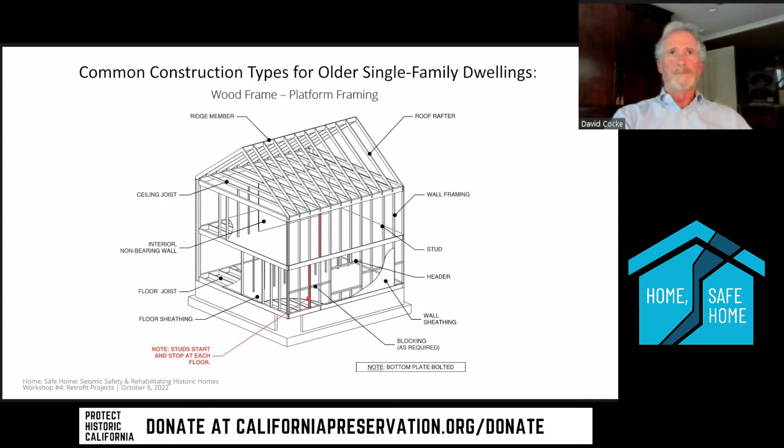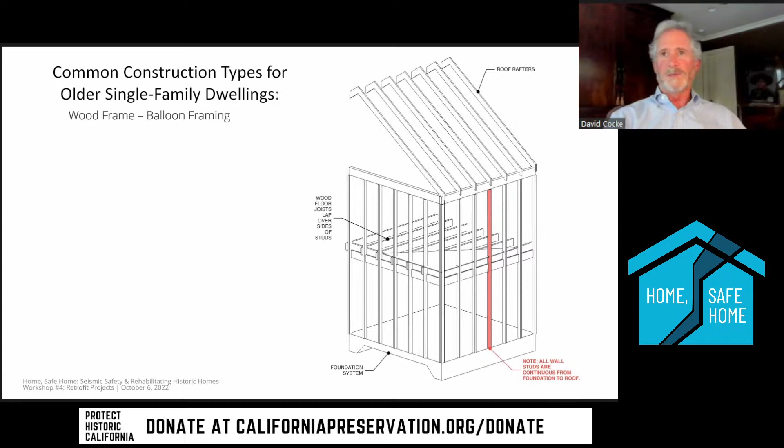A second type, an older style of construction than platform framing, is called balloon framing. That means all the wall studs are continuous from the foundation to the roof - one of them is highlighted there. What happens is the second floor joist ends are attached directly to the wall studs at the right height in one direction, and in the other direction they just put a ledger along the inside face of that wall stud - that's how they attach the second floor framing. Then they go up to the roof and build it on top of those tall studs. That's called balloon framing.

The third type, again wood frame and probably not as common, is called post and beam - a series of vertical posts and horizontal or sloped beams bearing on those posts. This isn't locked into only wood frame, it could also be steel frame. Some structures designed in the 50s, especially in Southern California, might be steel frame. Again, these are not as common as platform or balloon framing, but they are out there.

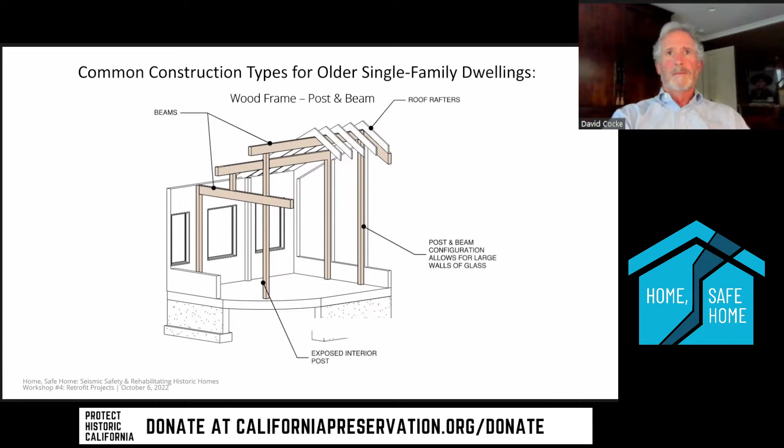Another type, significantly older and now more rare—it's not even allowed by code anymore—is called single wall construction. There's really no skeletal framing in the building. The vertical loads are supported by vertical boards, generally around the perimeter of the structure, but some interior walls can also be single wall framing. These vertical boards, usually 1x12s, 1x10s, or 1x8s, aren't as strong and forgiving as a wall stud system like we looked at in platform framing and balloon framing.

And often there's no foundation when they built these. These were generally rural applications, and they didn't build foundations—they just smoothed out the ground, set the wood directly into the soil, and went up from there.

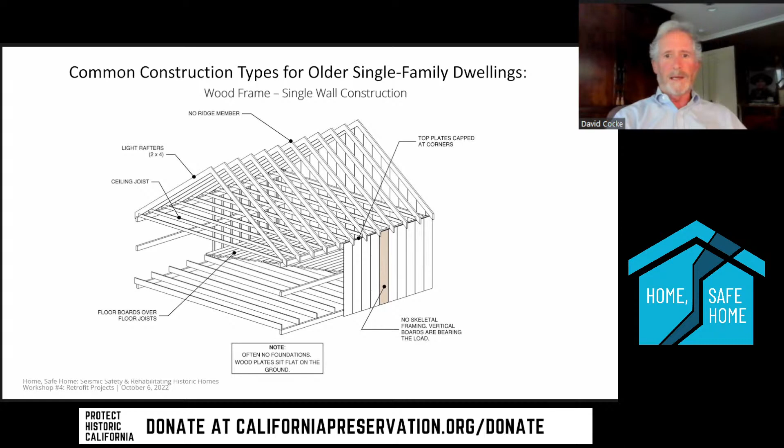There are also bearing wall buildings out there. They can be brick, adobe, what people call cinder block or CMU (concrete masonry units), stone, or hollow clay tile—a variety of these elements. But the difference is there are no wall studs behind those walls. All the vertical load, and even the lateral seismic load, is resisted by these masonry bearing walls. So if the wall were to fail, you would lose the vertical support of the floors and roof above.

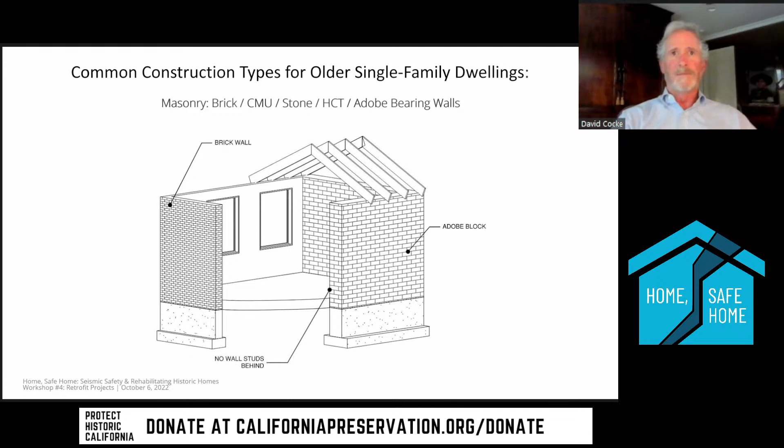Now I want to talk about three different foundations—we covered this last time. There are really three different systems, other than the single wall construction I mentioned. One is a slab on grade: they smooth out the soil and cast a concrete slab anywhere from 3 to 5 inches thick. Older homes may not have any reinforcing steel in the slab, but it rests directly on the soil—there's no raised floor, no crawl space underneath that first floor.

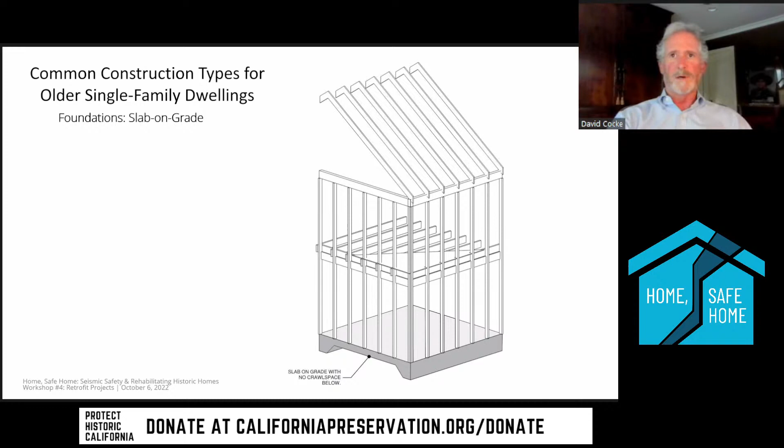The second type of foundation I want to mention is what we call stem walls. That's where you have the footing, the lower piece bearing in the soil, and then a short wall, which may be brick, stone, or concrete masonry units, maybe a couple of feet tall. Again, there's a raised floor, creating a void underneath surrounded by these stem walls, which forms a crawl space.

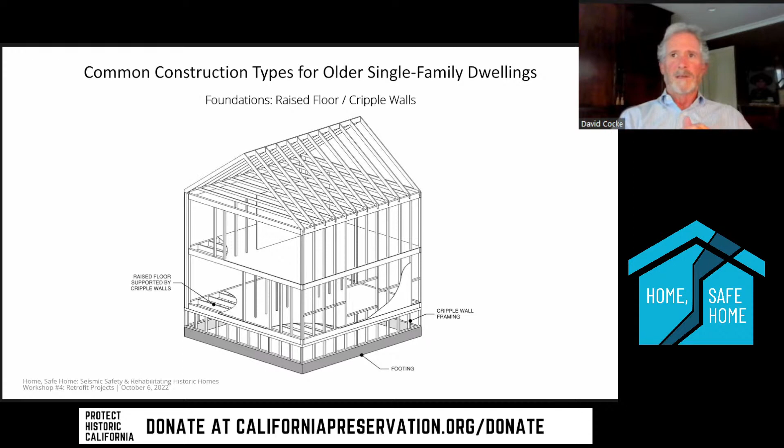Finally, we have what we call a cripple wall condition. Instead of a masonry, concrete, or CMU stem wall, you have short stud walls building up from the footing and supporting the first floor. Again, a raised floor with a crawl space underneath, and cripple wall framing underneath—these could be anywhere from 1 foot to 4 feet tall.

So those are the building types I wanted to jog your memory about and how we will deal with them. Now I want to talk briefly about the California Historical Building Code.

First, there's no trigger in the Historical Building Code—nothing says that if your structure has deficiencies, you actually have to go retrofit it. There are no government regulations requiring retrofitting. It's only mandatory when triggered by other code issues, and even then, it's still the applicable code. So if the building department says you have to fix your building, and it's a designated or eligible historic building, that would require bringing it up to the provisions in the Historical Building Code.

The last thing I want to mention about the Historical Building Code is that it's voluntary—nobody's going to make you do it. In fact, it specifically allows for partial upgrades. So if you have a list of five deficiencies you need to fix in your building, you're allowed to go back and address them one at a time.

And you could do one of these elements, go on, retrofit it, fix it, and then wait a few years later and do the next one if you wanted to. You could stretch these out and do them in phases, which we will talk about.

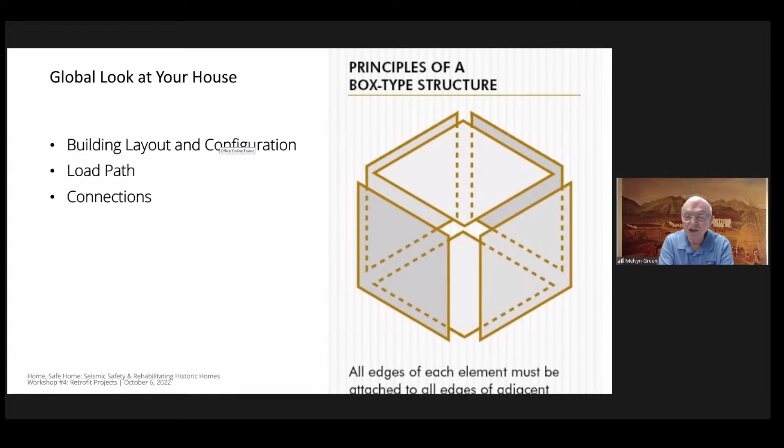Want to talk about looking at your house or various buildings and see what we see. First I want to mention that buildings, for the most part that we're dealing with, are what we call box type structures. If you think about a box, how relatively rigid it is, whether it be a simple shoebox or a grocery box, you can envision the walls and the sides of the box as being shear walls, the top of the box as being our floor or roof, but we call it a diaphragm here. What we're trying to do is make our box adequate in strength and its configuration.

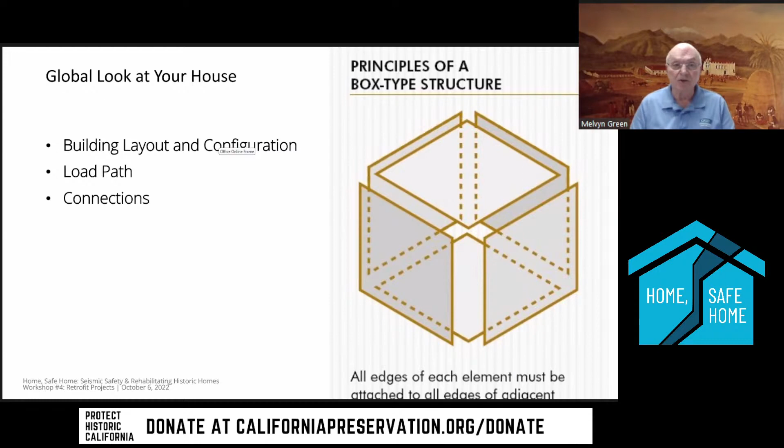We're also going to look at load path. How do the loads get through our building to get to the ground from the roof? And then connections of how we connect everything together. I used to say that the three most important things in real estate were location, location, location. I think in structural engineering, it might be connections, connections, connections, because that's often where buildings fail.

It was probably built in the 30s, perhaps the 40s. So it doesn't have quite the tying together elements that we as engineers would prefer.

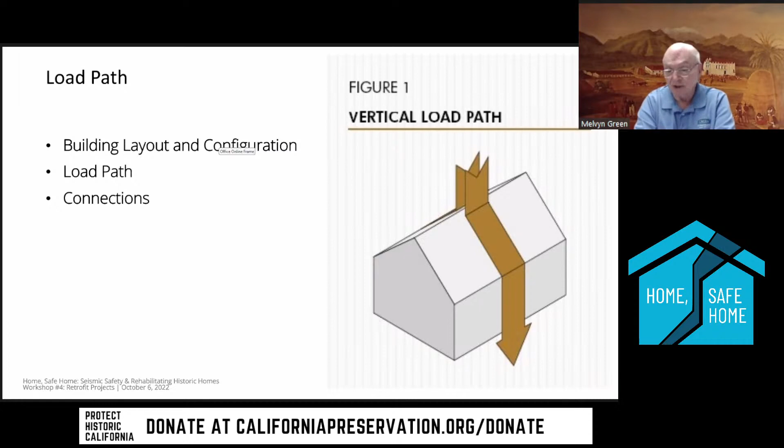How do the loads go through the building? If we think just intuitively, you know that if you're going to have the weight of the building, you've got to have some strength in the roof, and the roof has to be supported on the walls. And then of course the walls are connected or at least bearing on the ground. In earthquake work, it's the same way, except it's a horizontal force. That force is the weight of the building being shaken by the ground. And as it's shaken, you get these forces.

So in this sketch, you see this end wall here, and this mass of the end wall is what I'm trying to show. It's connected here at the roof line and transmits across the roof. Then transmitting across the roof, it gets to this line and then is carried down to the ground. Now at each point, we need to connect adequately. We need to connect the roof to the wall, then this roof to this shear wall, and then the anchor bolts at the foundation, and then the load gets through the ground.

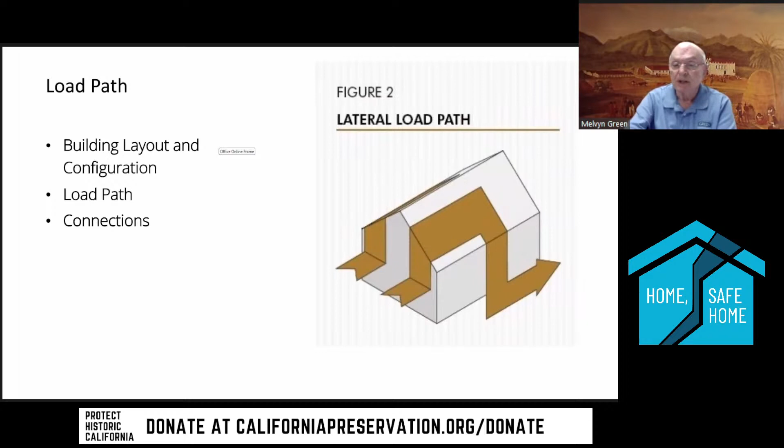That's the way an engineer would look at this. And here you see it again, forces of inertia act against the wall. We're dealing with inertial forces, and the forces push this way, and the wall holds it back this way. And all that's going on as the ground is shaking.

As engineers, we look at it in both directions, as the view on the right. So you see the force going in the east-west direction, and we have to anticipate, calculate the walls and the stresses. Then we design it in the north-south direction for the forces in that direction. Those become numbers, and those numbers are based on the particular site that you're at. It may vary depending on the type of rock that your ground is, whether it be clay, sand, different densities of rock will affect the forces in your building. So it becomes a site-specific design in some ways.

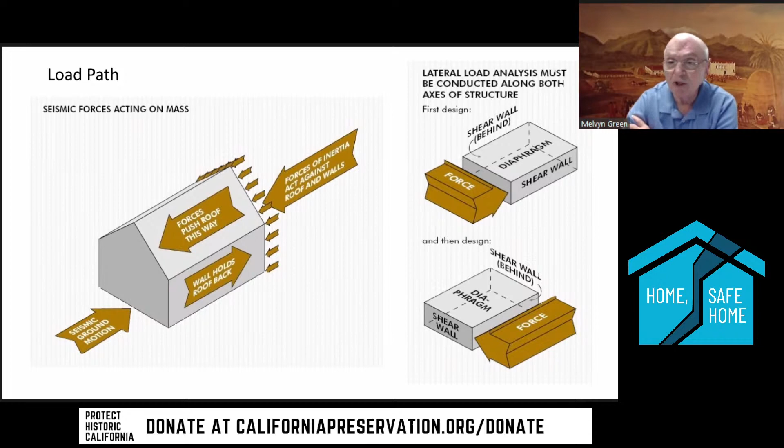So let's look at these retrofit strategies then. Our options include enhancing the performance of existing elements. So if I have some walls, can I nail them up a little better and add some bolts to improve them? Or could I add an element?

We'll look at some slides later in Maria's presentation about adding elements to strengthen buildings. I emphasize adding elements because sometimes if we can integrate our seismic retrofit with other alterations we're making inside the house, we can get both the new work and some seismic improvements. And then improve connections between elements and maybe look at weak links.

Here's just some sketches of connections together. What you see is that the roof sheathing is nailed to this blocking. The blocking's then nailed to this block. The plywood's nailed to this block, and then the plywood comes on down to the foundation. Now, I won't sing that the leg bone's connected to the knee bone or anything like that - I won't quit my day job.

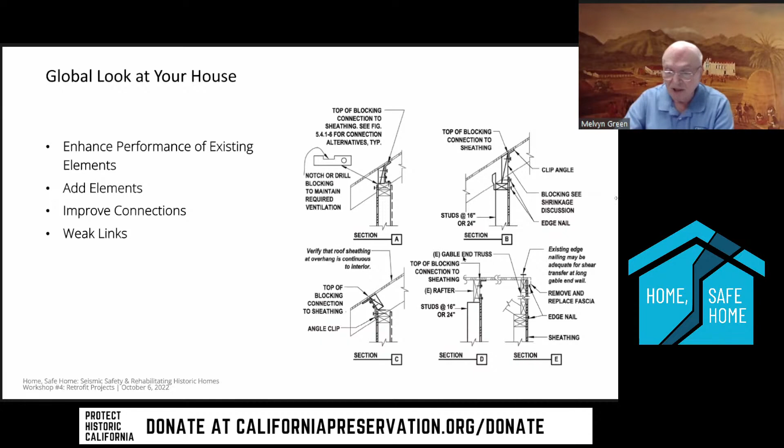Not all walls need hold down anchors, but I point that out, and you'll see more of that a little later. The nailing is also important and depends on the load in the wall. The closer the nailing, the stronger the wall is able to resist the earthquake forces. So as engineers, we specify the thickness and type of plywood and the nails and the nail spacing.

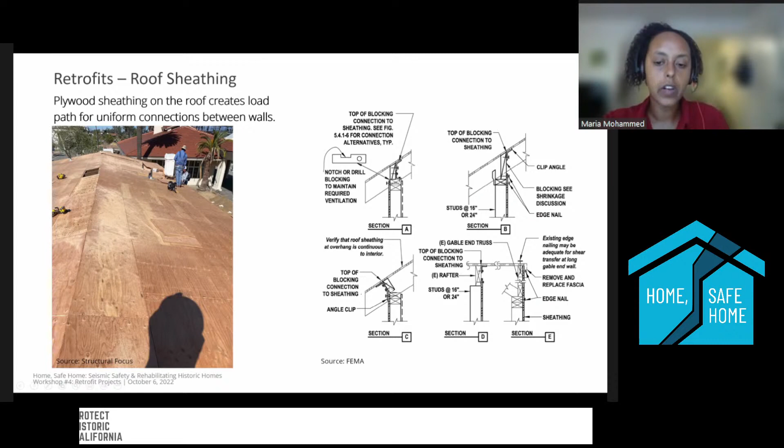It involves adding some blocking to receive nails that go through the plywood, adding some clips to attach blocking down to the top plate of the wall, and nails that attach plywood sheathing on a wall to the top plate of the wall. In some instances, we also add, as you can see in section B, some ties that are either vertical or at an angle, and similar in section C, blocking can be provided at an angle, and clips that can be angled can also be provided to complete the load path from the plywood sheathing of the roof down to the plywood sheathing of the wall.

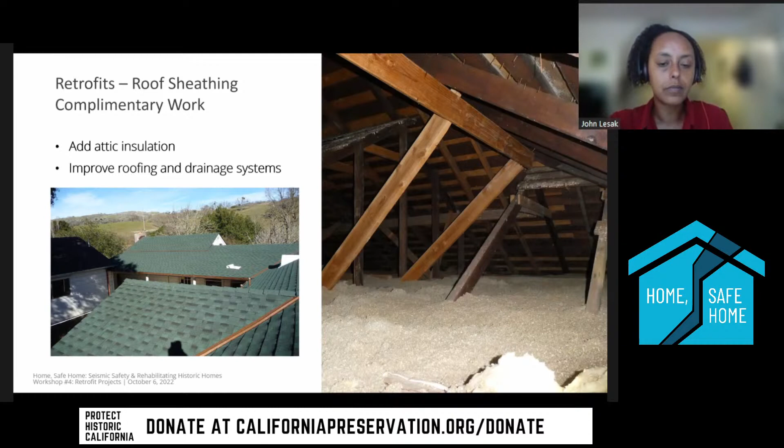As the architect on the panel, we want to make sure that people are thinking holistically about these projects, and the installation of the diaphragm really typically requires that you remove and replace the roof. It also provides good access to the attic.

So in the photo on the right, we see a spray-in perlite insulation that was added above the ceiling level. That's an excellent and cost-effective way of starting to control temperature within the historic home.

This also provides an opportunity to improve roofing and drainage systems. So the photograph on the left shows a new valley, as they call it, where the two gables meet - kind of the diagonal copper piece. New roofing. It's also critical, and we'll talk about crawl spaces a little later, that we provide natural ventilation to attic spaces so they can not be too hot or too cold, and that gas or something from a fireplace doesn't get trapped within the space and lead to other problems.

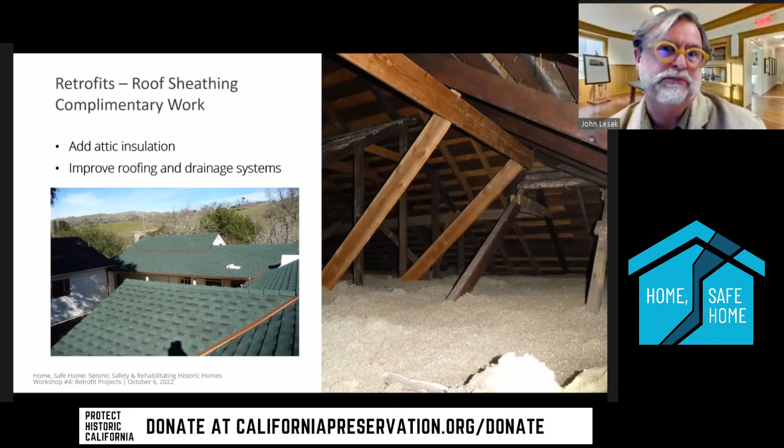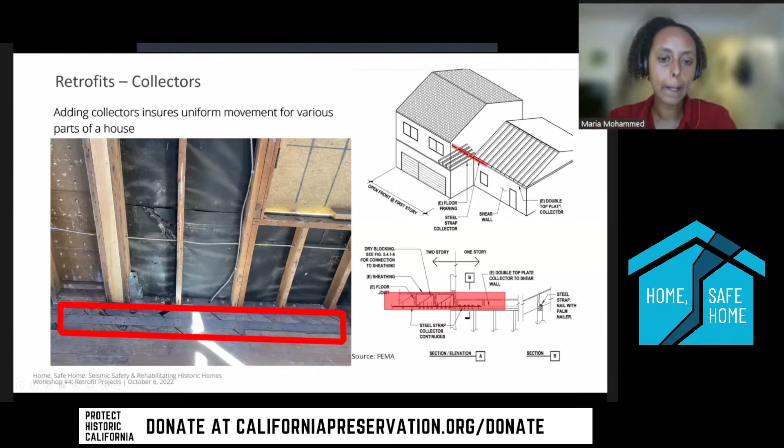The next part of retrofitting a house is related to shear walls. Now that the load is properly connected at the roof level, and we can utilize collectors to transfer the load between one part of a house to the other, the load then goes into a shear wall.

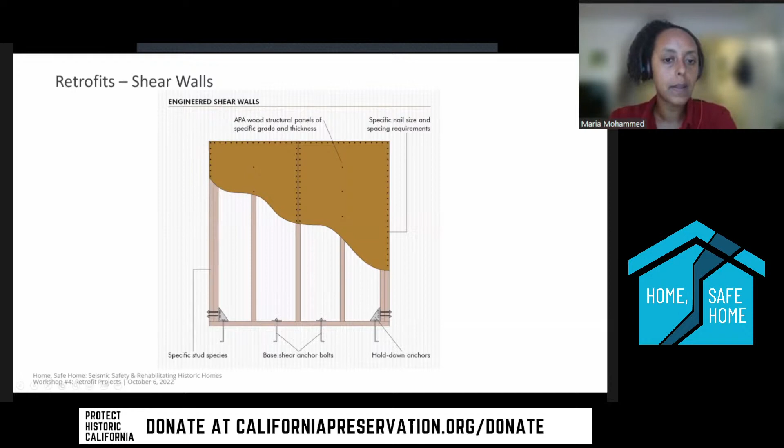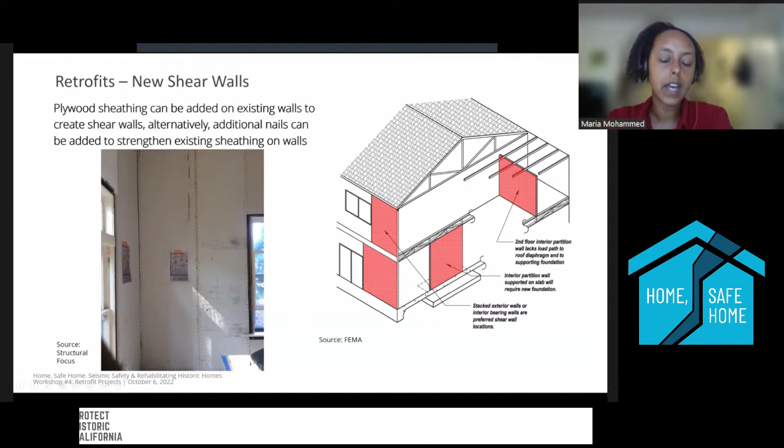The photo on the left was an instance where an existing exterior wall was enhanced to also become a shear wall by adding plywood sheathing on the interior face of the wall. The illustration on the right shows how shear walls can be located at various locations of a house, be it interior over existing partition walls or new partition walls, or along the exterior of a house.

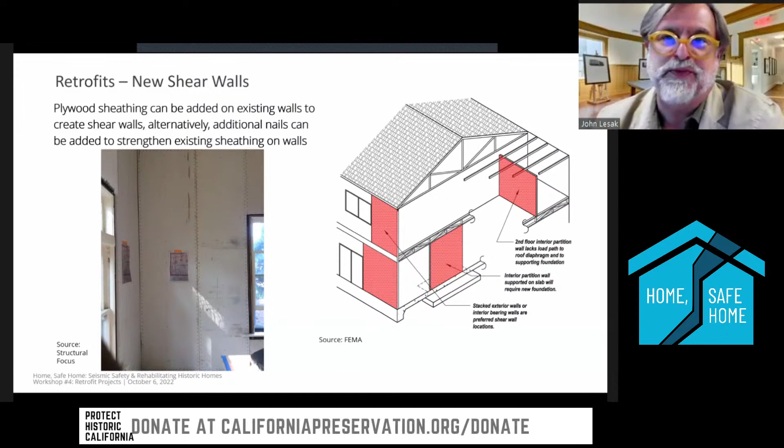Maria, it's John. I just wanted to chime in that often people are doing some small interior renovation with a project like this, and sometimes that provides an opportunity to either install a new wall or put shear panels on top of an existing wall, in addition to moving around some rooms or maybe enhancing a kitchen or something like that. Yes, absolutely. Thank you, John.

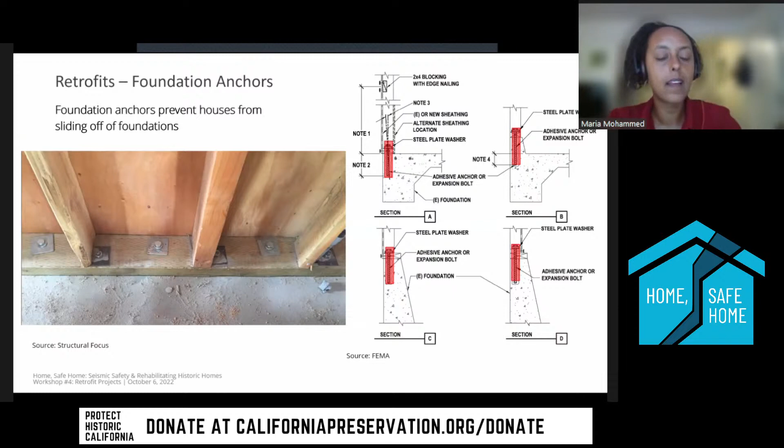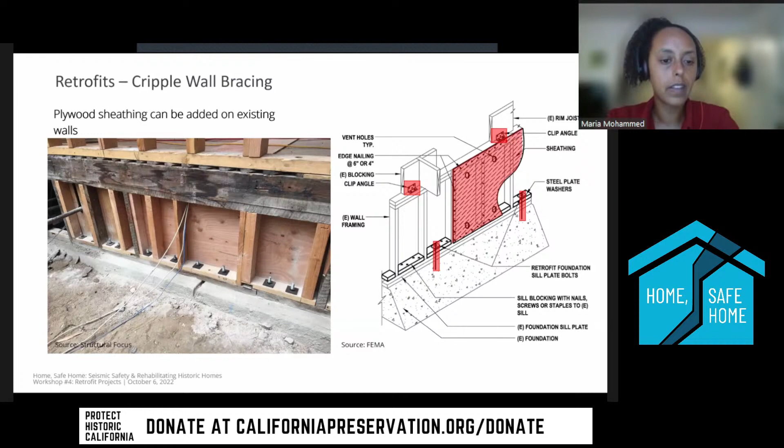Maria, could you actually go back a slide? Sure.

It's important to consider ventilation of crawl spaces, which need to be ventilated for a lot of reasons, but one is that should water or moisture get into the crawl space, you want to make sure it's able to dry out. In the diagram on the right of this slide, you'll notice vent holes are being drilled through the plywood on the interior face, so should moisture get into the wall itself, the wall has an opportunity to dry out.

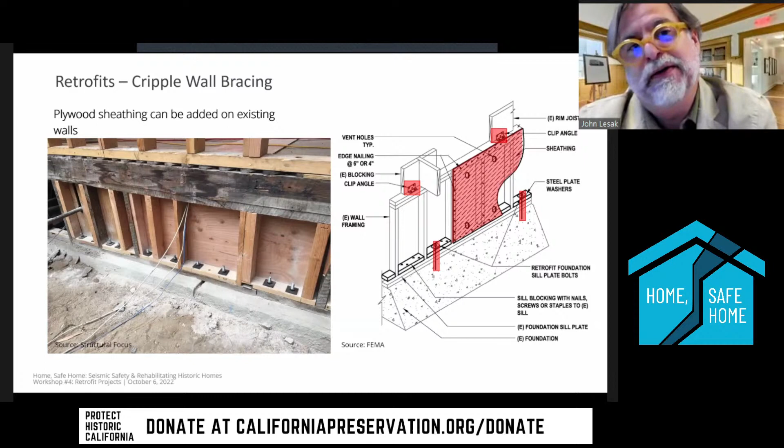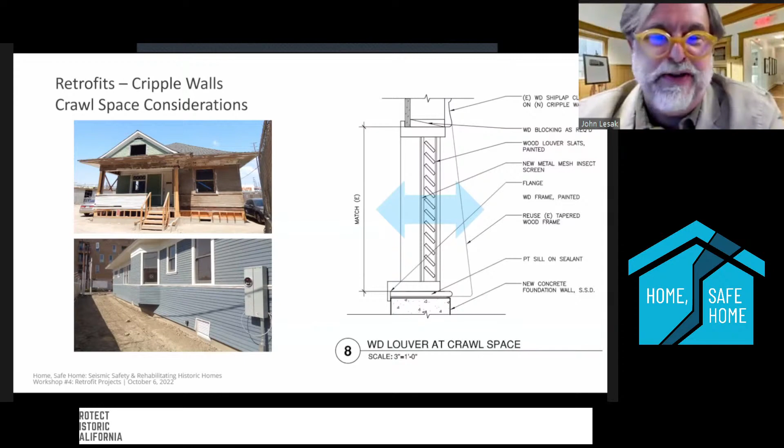David also mentioned this earlier in terms of resources available, and one of the resources available specifically for cripple wall bracing is through the California Earthquake Authority, called the Brace and Bolt Grant, which can be used for retrofitting cripple walls. They have an illustration of what it all involves.

The Earthquake Brace and Bolt program will provide up to $3,000 for seismic retrofits of homes constructed before 1979 that have a raised first floor supported by short stud walls called cripple walls.

Older homes supported on cripple walls typically lack sufficient earthquake bracing under the first floor. These houses with unbraced cripple walls are vulnerable in large nearby earthquakes.

To determine if a house has a cripple wall, access the crawl space under the first floor. The crawl space is typically accessed from outside the house through an opening below the first floor. However, sometimes the access is through an opening in a closet floor inside the house.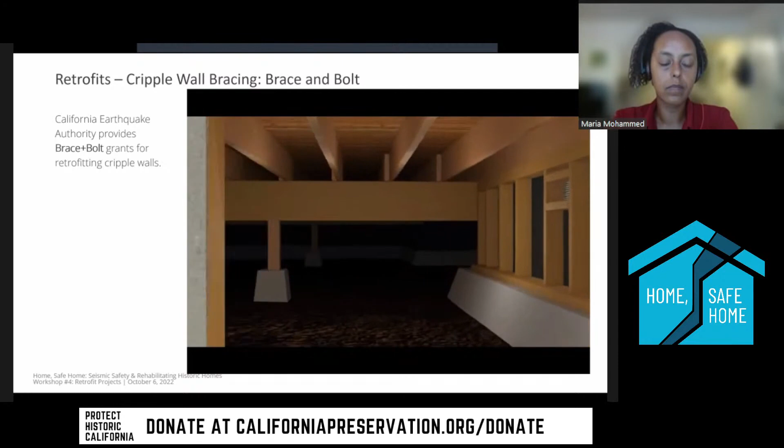The qualifying cripple wall house has a wood first floor supported by short wood studs at the exterior and on beams and piers at the interior. The exterior cripple walls are supported on a continuous concrete or masonry foundation. To qualify for the Brace and Bolt program, this stud cripple wall may not exceed 4 feet in height.

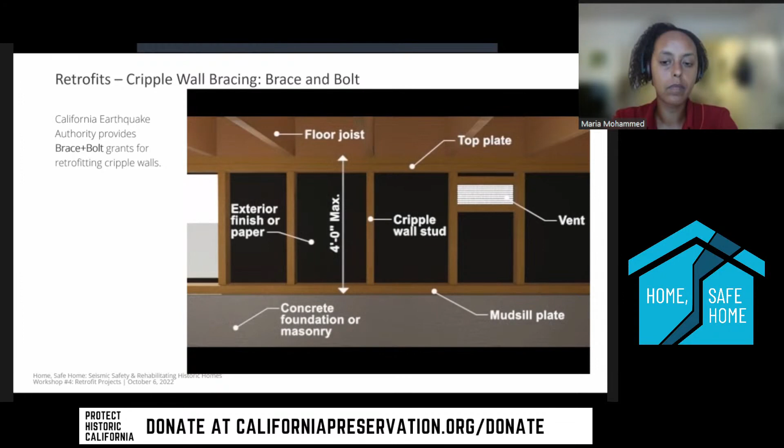Earthquake Brace and Bolt projects must be completed using the California Existing Building Code, Appendix Chapter A3. The Chapter A3 retrofit requires the installation of new foundation anchors and cripple wall sheathing for bracing.

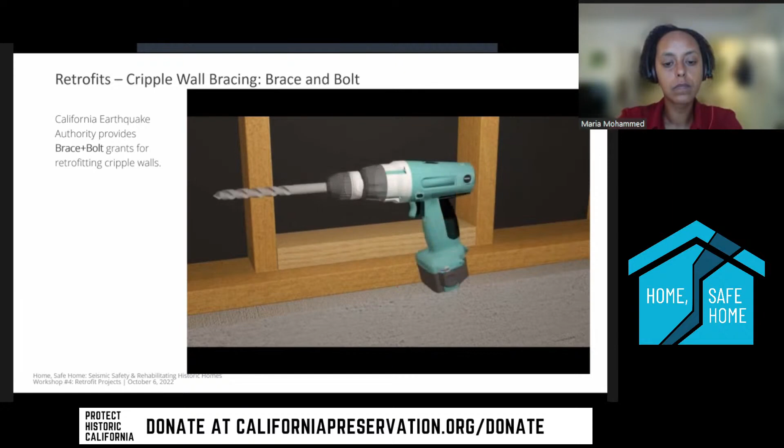To install foundation anchor bolts, new blocking is placed between two studs at the location of the new anchor. A hole is then drilled through the block and into the foundation. The hole is then cleaned thoroughly.

To install an adhesive or epoxy anchor, the adhesive is inserted into the clean hole in accordance with the manufacturer's recommendations. A threaded rod is inserted into the fresh adhesive. A plate washer is installed and secured with a nut.

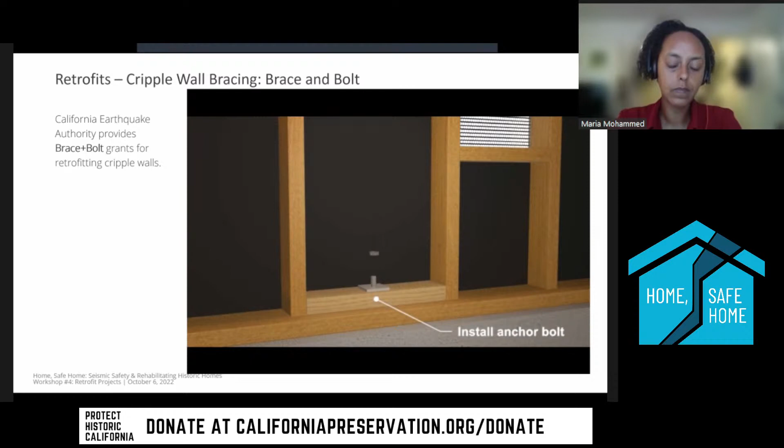Expansion or wedge anchors may also be installed. Required anchor size and spacing is specified in Chapter A3.

The retrofit also requires installation of new plywood or OSB sheathing on the inside of the cripple wall. The sheathing must be continuous from the mudsill to the top of the cripple wall. Sheathing size and length is specified in Chapter A3. The sheathing has vent holes and is nailed in accordance with the code.

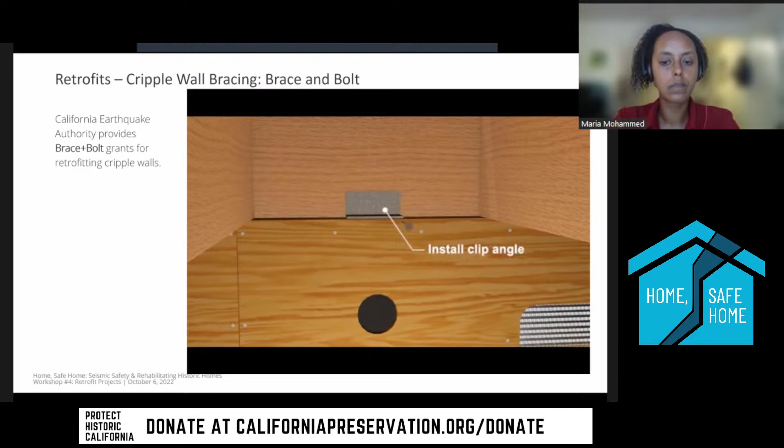Finally, most CEBC Chapter A3 retrofits require installation of new framing clips at the top of the cripple wall.

For houses with short cripple walls, there may not be enough room to drill a vertical hole into the foundation. Foundation plates approved by the building official can be installed between the mudsill and foundation in lieu of anchor bolts.

So this video, we chose it because it shows what the process of bracing an existing cripple wall entails.

Another component of retrofit to address vulnerability is for houses that are located on a hillside. The reason that hillside foundations are critical for retrofitting is because of how the seismic force is applied on a house.

In some instances, it may also result in what we call torsion, or twisting, of the house because of where the base of the house is located at one end versus where it is located at another end.

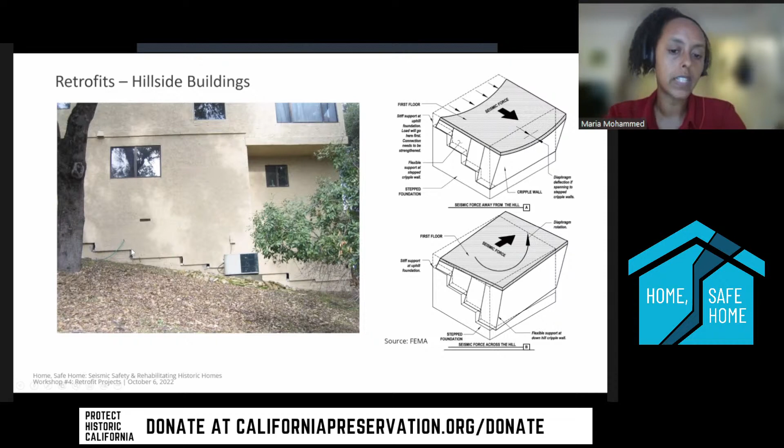Now we're moving into a retrofit of vulnerable components of a house. As mentioned earlier, one of the most vulnerable areas in wood-framed houses with a chimney made out of brick is separation of the chimney from the house.

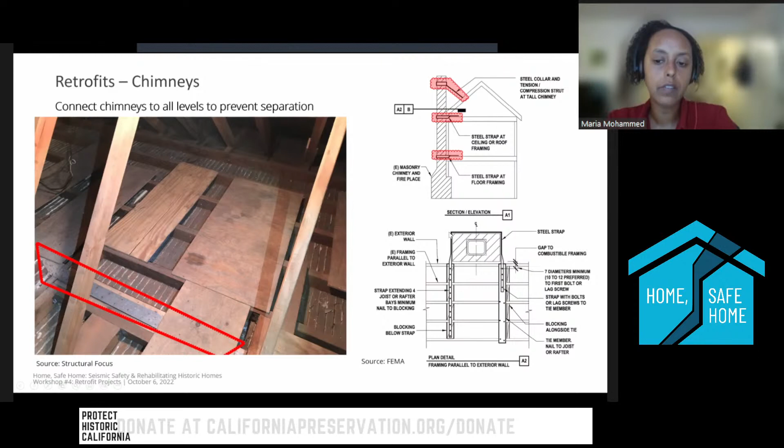In plan, as you can see in plan detail A2, the connection entails addition of a strap that wraps around the brick masonry and gets connected to the ceiling joists or floor joists at the floor level.

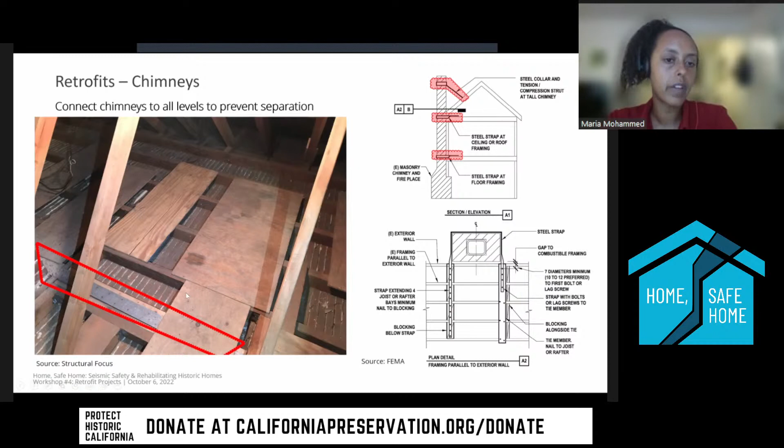The photo on the left shows a strap that has been installed at the ceiling level of a house. The chimney in this photo is located here on the left-hand side, you can see the corner of the brick. The strap ties the chimney back to the ceiling joists, and it extends long enough along the ceiling to have sufficient connection so that the chimney doesn't peel off of the building.

And now we go into retrofit of masonry buildings, and Mel will go over this.

Sorry, I think if we could, we have a couple of questions related to the wood framing retrofits that might be good to address before we move on. The first was, what kind of clips attach directly to the roof plywood when you're reinforcing the roof diaphragm?

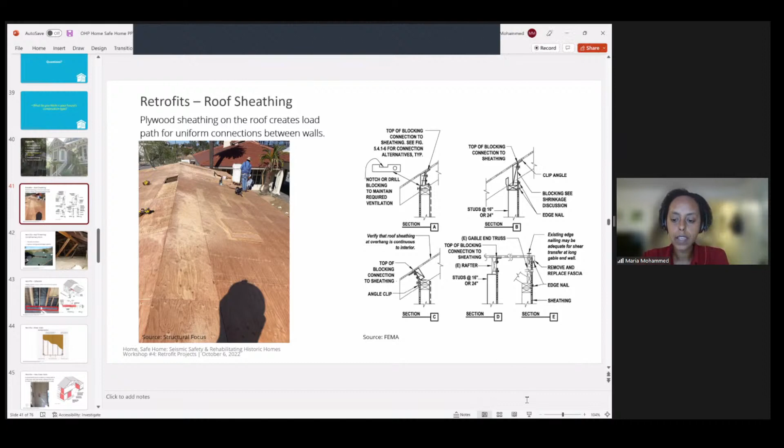Let me reshare that slide so I can explain it. So the clips that you see in this detail, we have one type of clip in section A, a similar type of clip in B, and it looks like C is a unique one.

So these clips, we refer to them as A35 or A34 or LTP clips. Some come flat, those are the LTP clips. Some come pre-bent, those are the A34 and A35 clips. And some can be bent to whatever angle you need, and those are variations of the LTP clips. But the types of clips are just variations of LTP and A34, A35 clips.

If I can add a comment here, these are literally off-the-shelf items, that's the key point. There's nothing exotic that we've been doing here for the most part. The terminology Maria used was for the Simpson company, but we're not promoting Simpson, there are other firms out there that make metal connectors. You can go to Lowe's or Home Depot or any similar place of building materials and find these kinds of clips.

There is a follow-up to that: do you use screws as the plywood is 5/8 inch thick? Go ahead, Maria. Yes, you can use screws. You can also use nails that are capable of going through 5/8 inch thick plywood. Both can give you similar performance for a diaphragm.

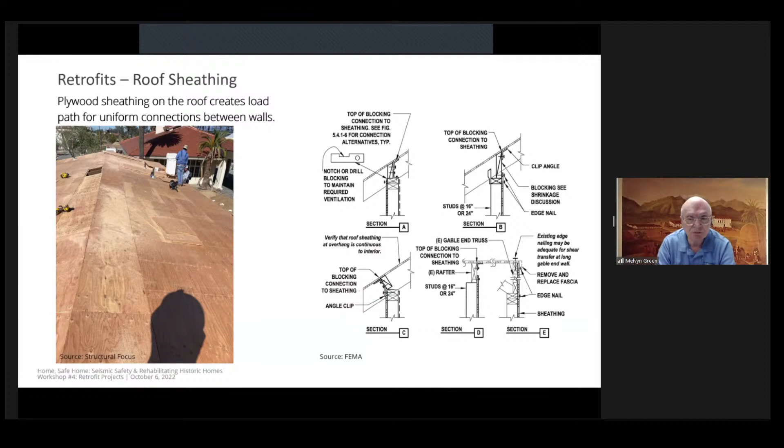Do you want to take this one, Mel? I'll just say, drywall misbehaved in past earthquakes. When I say misbehaved, it cracked a lot and had a lot of damage. After the '71 earthquake, the capacities for drywall were reduced by 50% because of the damage observed.

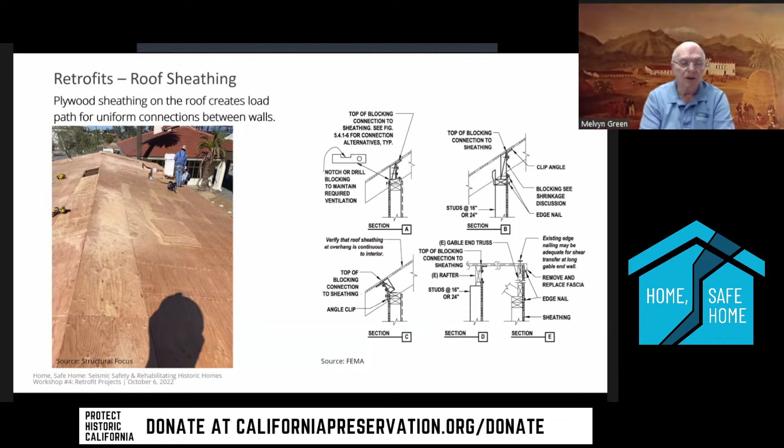But it is still permitted in some zones or regions, and may be permitted elsewhere, I'd have to check the code. The experience with drywall indicated we wanted to just put low loads on them. You can do it, you just have to acknowledge that you're probably going to have more damage in an earthquake than if you have plywood. I would agree, and I'll add it's better than nothing, but we would certainly recommend plywood.

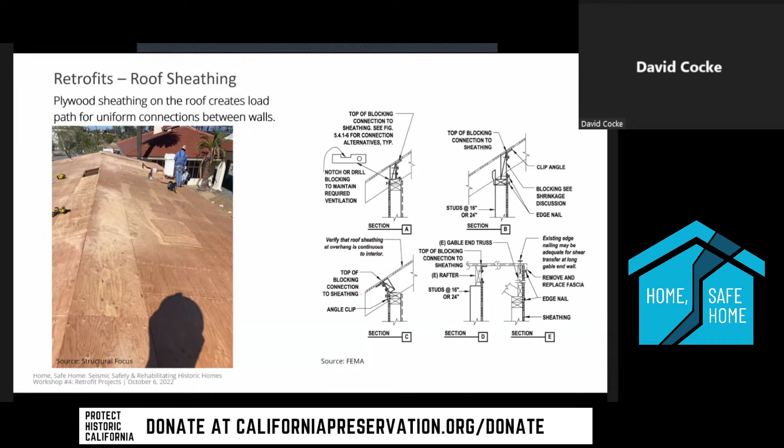And then you could cover that up with sheetrock if you wanted. Great, thank you.

All right, and then there was a question about, I guess I'm a little unclear, David, you had a message in chat, not David Cocke but David, an attendee, a follow-up question to the screw question about reduced values. Can you clarify what your question is, please?

Okay, I guess the question is that a screw into 5/8 inch thick has very little holding power relative to nails. I guess it depends on what you're going into. I'd say he's not incorrect. That's one reason drywall isn't as effective as plywood. In the context of a diaphragm, whether using nails or screws, when looking at capacity or requirements, if you're swapping with screws, you need the same penetration as the nail length would require. So you'd use the same length screw as the nail. That way you get the same penetration into the wood and the holding capacity doesn't get reduced.

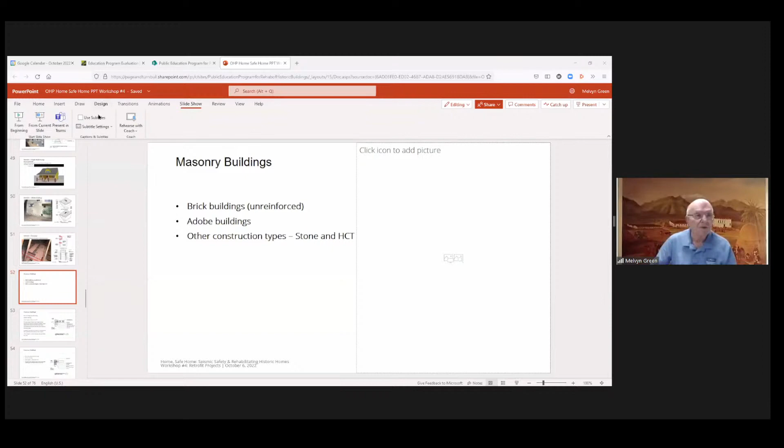Let's take a quick look at a retrofit of masonry structures. Typically those would be brick buildings, unreinforced masonry, adobe, and other types of structures such as stone and hollow clay tile. The principles and concepts still apply: you have to connect things together and make sure they're adequate.

Here on the right is a detail we'll look at in a moment. The principal failure mode of masonry walls is that the wall falls outward from the floor. So our goal is to hold it back. In the retrofit of many commercial buildings you'll see steel plates on the outside, perhaps spaced 4 feet apart. The plates are about 6 inches square, and the bolt goes through the wall and into the plate, then connects to the floor, as shown here with a steel strap and an angle connecting everything together.

This would be the same concept for a stone building, hollow clay tile, or adobe - we do them all like this. Typically those bolts are epoxy adhesives, and notice they don't go through the wall. If you ran them straight through the wall, you'd grab only a handful of bricks for strength. If you run it at a diagonal, at 22.5 degrees, you'll find 7 to 9 bricks are connected together in this work. The key point is that the bolt does not go through the wall, so visually there's no impact on the historic fabric of the building.

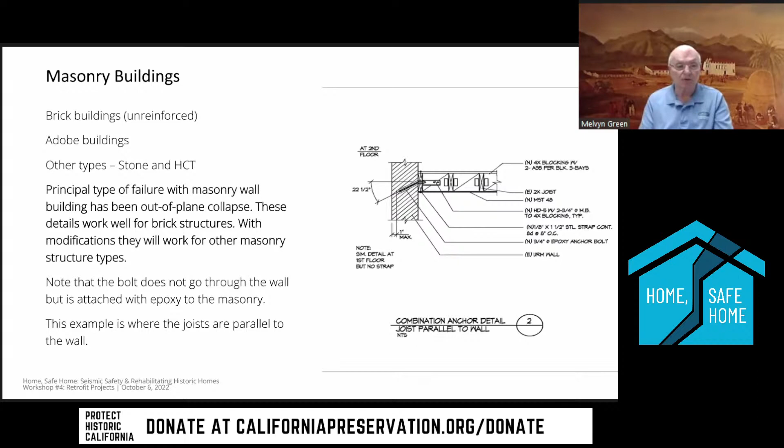This one is where joists are parallel to the wall. Here's the joist. If we go to the next slide, here it is perpendicular to the wall. Same concept applies though, and so forth.

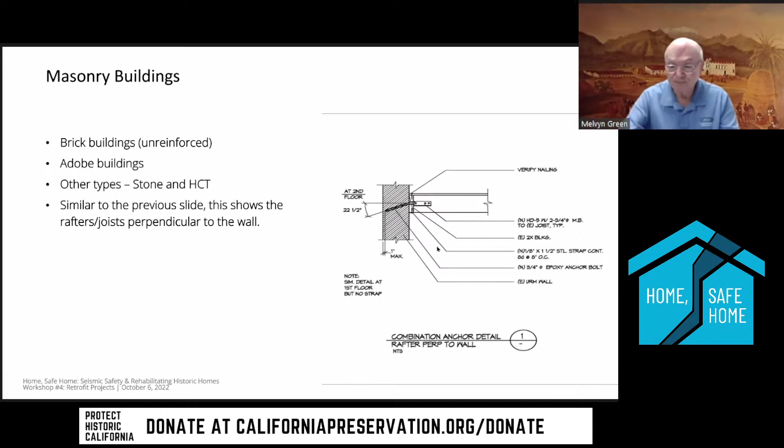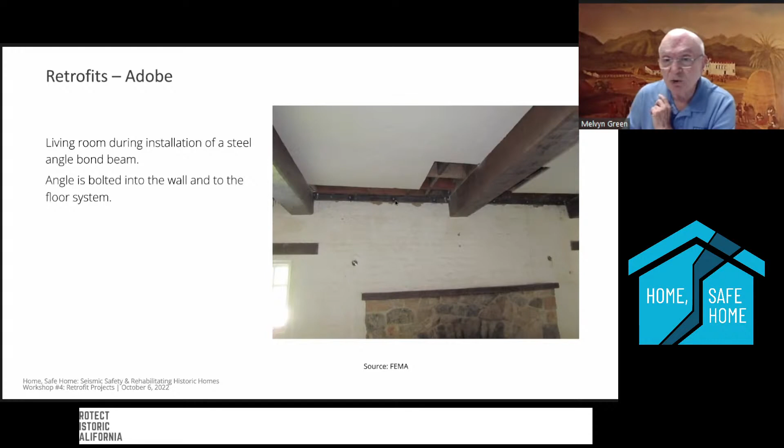In the living room, what we do in adobes and many other buildings is put in a collar or bond beam. Just as your collar holds your head on, these bond beams tie the walls to the floor above. Here you see a steel angle iron bolted into the adobe and then bolted up into the floor joists above. The bolts obviously don't go through.

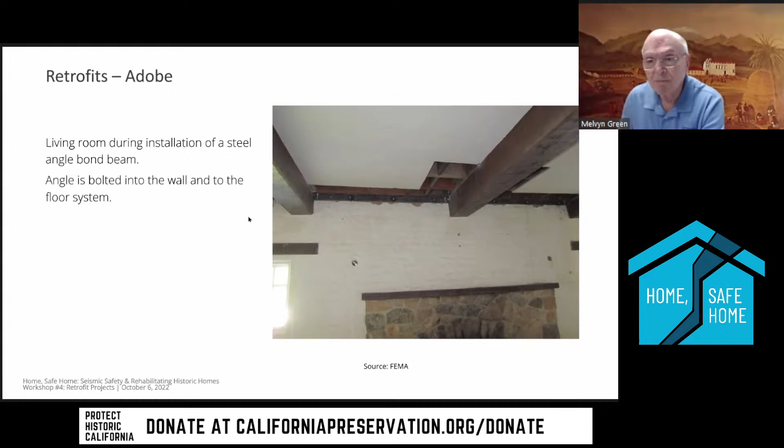And then here it's finished. The owner chose to paint this to pick up the theme of the beams itself. This is a finished building and it's retrofitted. So that's that.

Okay, whose turn is it?

So we will revisit the quiz questions from earlier now that we've shown you some retrofit schemes. John, I don't think we need to run the answers again. I could just go over the answers without having to do the poll again.

The last one, 16 out of 17 said cripple wall sheathing, which is correct, and 1 out of 17 said foundation anchor bolts, which is also correct, because you would install foundation anchor bolts as part of the cripple wall sheathing.

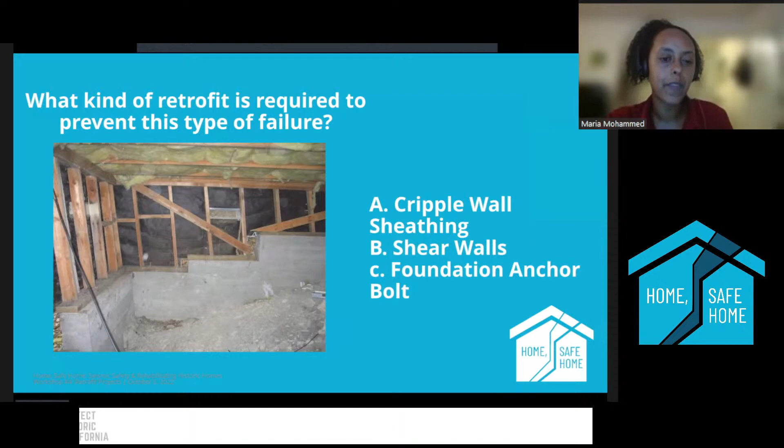This photo and this failure also is that of a hillside. So as part of the hillside retrofit for this specific house, cripple wall sheathing and bracing and foundation anchor bolt addition will all be included as part of the retrofit. So this one was not as straightforward, and the split between the answers was more or less expected.

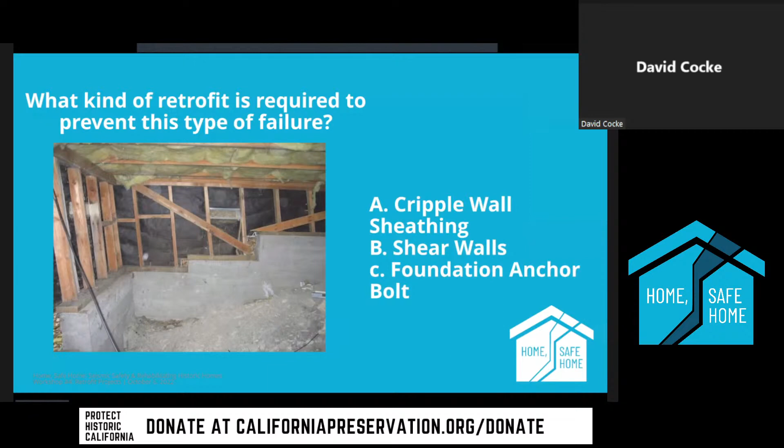David, Mel, anything else you would like to add for this? Just to say there was debate in the project team about what the risks were with this, so it wasn't quite so clear cut. And this photo also shows insulation of the first floor framing, which can be added when you get access to do work on the cripple wall through the crawl space.

Do we have any more questions, Sarah? I see one from David again. Oh, sorry, I was just muted. Sorry about that.

Yes, we have one related to this section, and there's another we'll save for the end. The question is about the picture with the shear failure around the soft story opening on the garage, noting that the aspect ratio wouldn't work for shear walls. This gets into a conversation our team was having about other options for an opening of this size, so maybe we want to touch on that now.

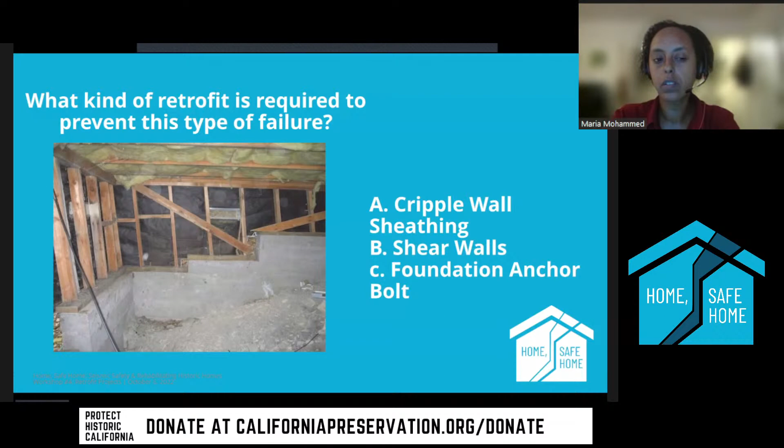Shear by rotation? I'm not sure what shear by rotation means - what he's referring to. In that section of the California existing building code, in the foundation section, it talked about rotation, where we permit the building to quote rotate, and then the load goes into the opposite walls. It said with permission of the building official, and there may have been other conditions. So it's not an easy question to just say yes or no.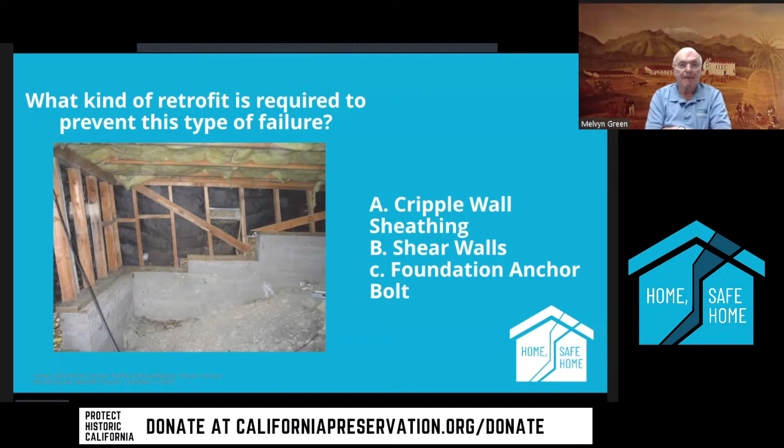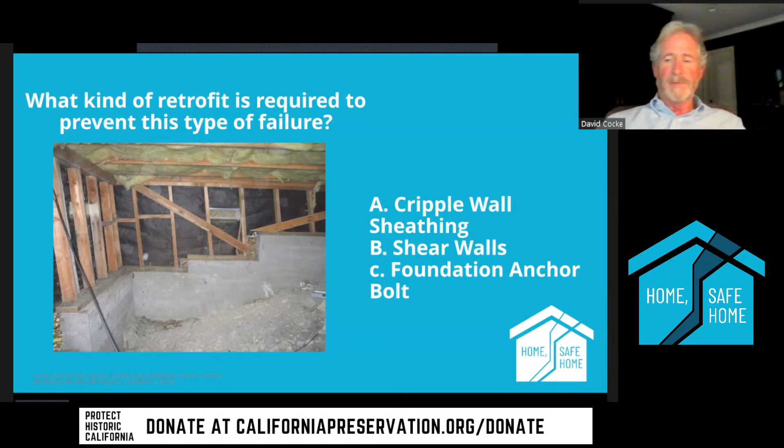And I assume, Mel, we're talking about the existing building code, not the historical building code. Correct - the historical building code wouldn't necessarily require you to address that. But the existing building code, just as Mel said, tells you that you need to address it or talk to the building official about it. Thank you.

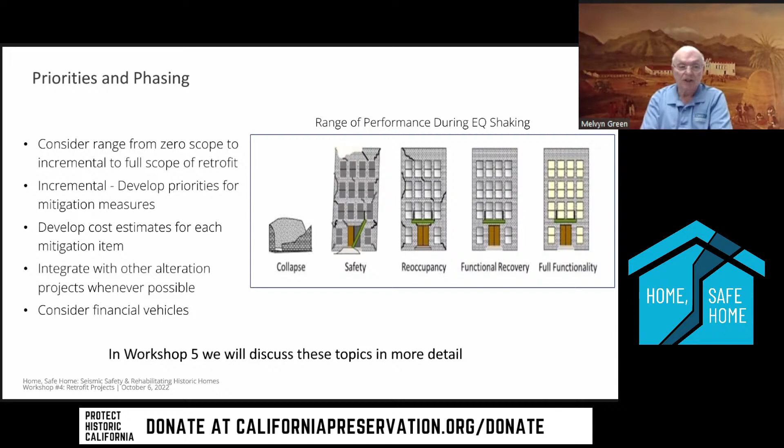If you're going to do something incremental, develop priorities, because most of us cannot do this all at once. Get a sense of the cost for each mitigation task, integrate with other projects, and consider the financial vehicles, which we'll discuss more.

We saw a little of the brace and bolts. There may be more in the next workshop.

So we are going to briefly identify a couple of financial incentives that exist for historic houses and sometimes existing houses. These are fairly specific to California, but there are similar types of incentives in different states, and they do vary. The first one is just a grant program.

I like grant programs because they basically give you some cash. The California Earthquake Authority's Brace and Bolt Grant Program offers a few thousand dollars for bracing and bolting your house to the foundation and bracing things like cripple walls. It's important to note that in two weeks the program will open for this year.

An incentive unique to California is the Mills Act property tax abatement. In a Mills Act, you enter into a contract with your local municipality, and the rules do vary somewhat depending on where you live. Effectively, they will reassess your property, and there are three different methods, which we'll go into in more detail in the fifth workshop. You can get a property tax savings in exchange for maintenance and repair of historic homes, with an emphasis on prevention of catastrophic events like collapse, earthquake, or fire.